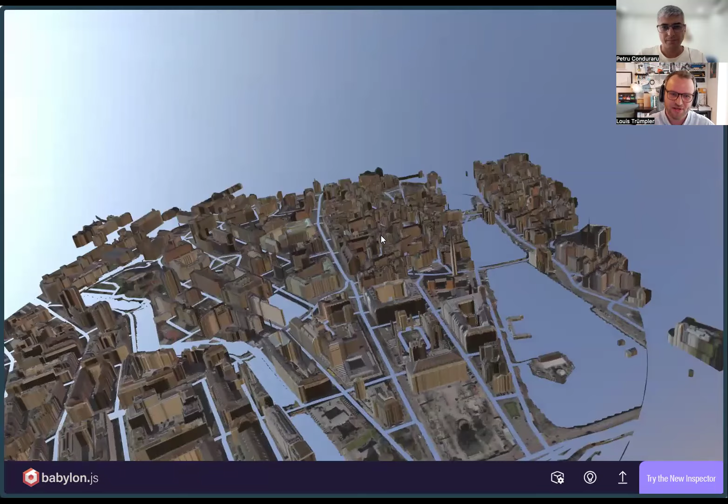Okay, let me share my screen. You should see that now—can you see that? Yes, I can see your screen. Nice. This is Babylon JS, an online GLB viewer, and this should just set the stage a little bit for what we'll see today. We are in Zurich, down in the city, looking from above, and we can also tilt this to see that we are looking at real 3D buildings overlaid with satellite imagery.

But if we wind back a little bit and take it one step at a time, the topic for today is actually the open BIM permit. When I say open BIM permit, what I mean is a permit application process based on open standards and open source—so that means it doesn't involve proprietary tools or proprietary data formats. Everything is open, accessible, and reproducible.

This whole thing started for me because I was asked by a few different people around this topic of open permit or building permit, and I had the pleasure to do some research from time to time. People contact me to find out some interesting stuff for them, which I gladly do, and since it's all open source, I can share it here today.

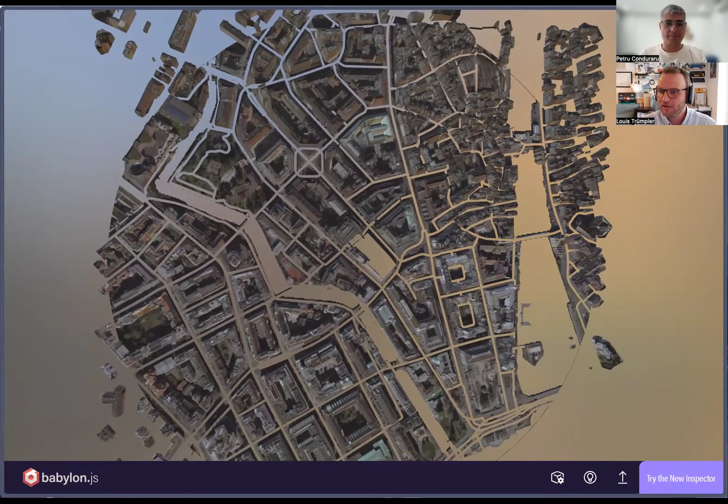That's amazing. And the whole thing basically started with the question—and it started here in Zurich actually—can we find out what can be built on a certain plot? So if we look at this map, and maybe we can color it, then for those of you who have been to Zurich, it's quite a nice area down here by the lake. So I thought to myself, well, it would be great if we could build something down here.

So I had to look around for some free plots, but yeah, it's all taken. But then I realized there is something here, and what I built as a prototype lets us do exactly that. I will quickly show this to you, and you can try this at home if you want to. Petru can share the link.

It only works for Zurich addresses, and it only works fully for the city of Zurich, because I've only implemented their building codes. So what you have to do is exactly what I did: you go to Google Maps, you find an empty plot, or you find some kind of plot, and then you copy the address.

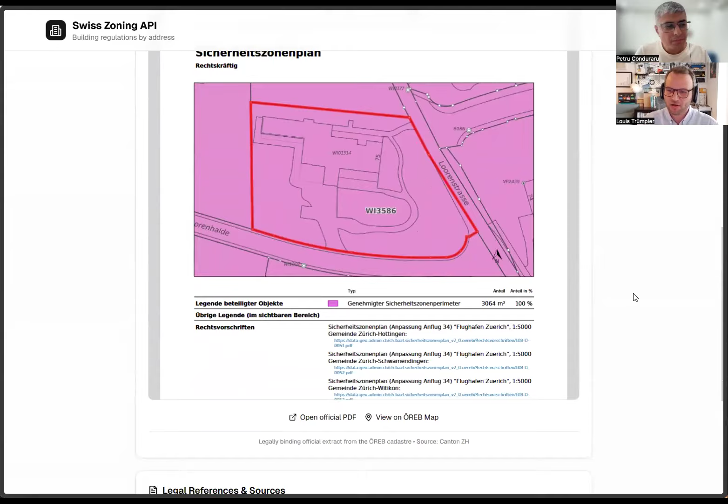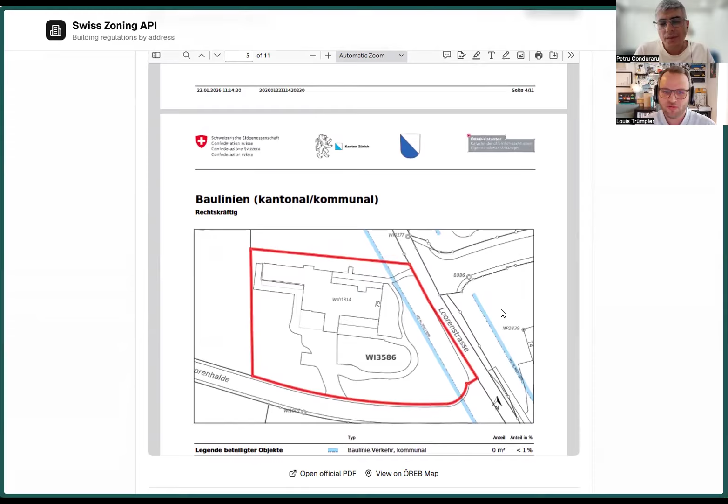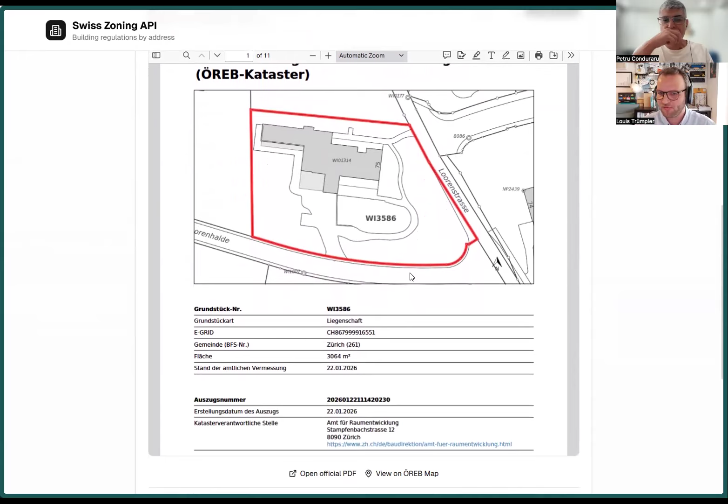If we then go a step further into the ÖREB, which is from our local municipality, we get all the restrictions for this site. For example, we can see here that this is actually in the flight path of the airport Zurich, and therefore there's some restrictions on this site. I don't know exactly what that means, but maybe that means something for an architect. You can get all the information from the official sources on this site that usually is a bit hidden in some PDFs, etc.

Does that make sense so far? Yeah, yeah, it looks very interesting.

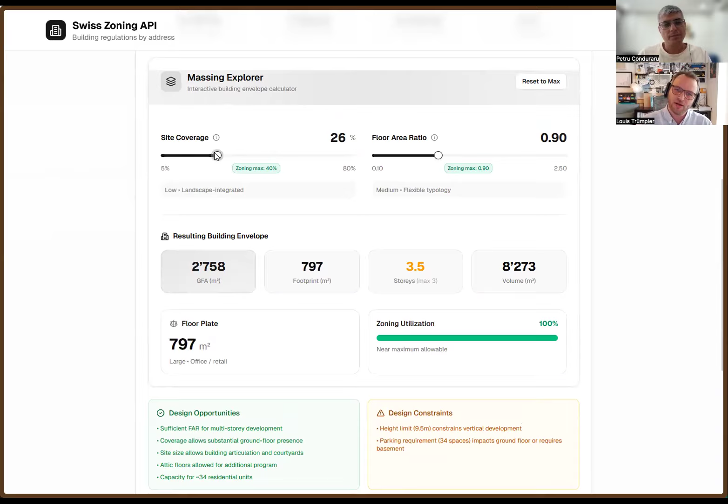So yeah, this information can then all be pulled together, and we can have a look at stuff like site coverage, or in German the Überbauungsziffer, and also the Ausnutzungsziffer, which is a floor to whole site area ratio. We can kind of say, well, if we only cover like 20%, and maybe we only have 0.8 floor ratio, how much could we actually build then? How many square meters? And maybe how many units if it were residential, or if it was an office.

So very early in the planning stage, before anything has actually begun, we can find out programmatically through openly available API sources, totally free, the potential of a certain plot in Switzerland, or at least in Zurich currently. So this proves that on the data side, there is a lot possible.

If we know where a building is being built, we can get the building codes for that building. If those building codes were in a machine readable format, which is of course not the case, I had to transpose them myself into something I can work with. Then it would be very easy to go to the next step, which is geometry, of course.

Let me share the GitHub for what I just showed you. It's open source, and the code is available for those that are interested. That can be run through the website pretty easily.

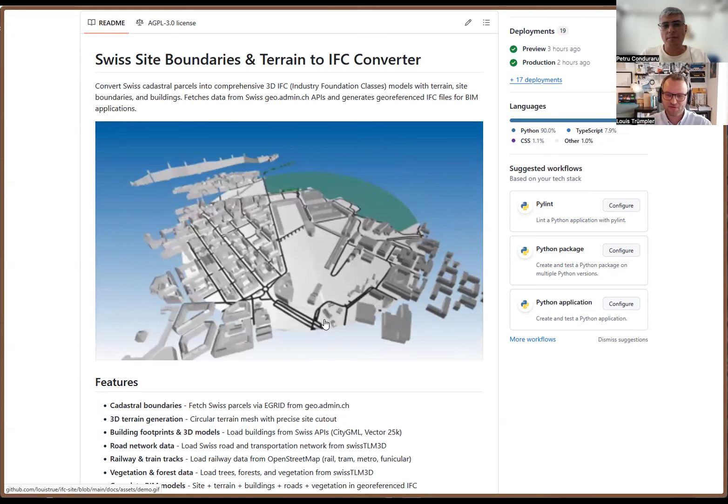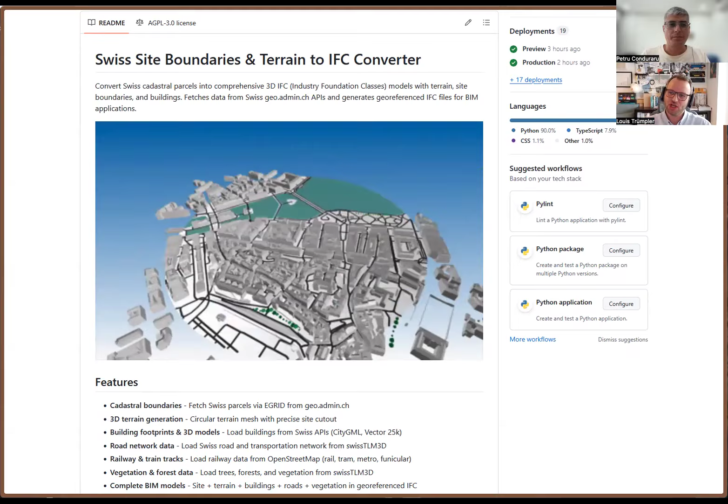Of course, there's a lot more that has to go into it to be complete. But then we have the basics: we have the IFC model, we have the official cadastral data, and now what I'm showing is how to also get the site boundaries and context into 3D, which then enables the later workflows that I won't be showing today, of actually checking how that building is going to work on that site and with those restrictions.

Makes sense, yes. IFC site lives on GitHub here, and I have to do a very quick tangent into software architecture. What I developed here is mainly a CLI, which is a command line interface.

That means you download the repository and you can run it on your machine. So your machine has the CLI and it reaches out to the APIs, it gets all the data, and it builds the IFC or the result files on your machine, which works great, especially for very large sites. It's basically the only way to use the full potential of the tool right now.

I have exposed it as a server API and I've developed a front end, but I did that just for today and it's still very prototypey. You cannot do things like get a kilometer of site over the API. I am not paying for a server like that, and it doesn't make any sense to do it like that.

If you want to do it like that, I would suggest you download some kind of code editor, maybe one that has some AI built in, and tell it: give it the URL to this repo, and just type in 'help me run this in the CLI,' and it will do it for you perfectly, and it will create the IFCs for you. Then you have it on your machine, and you can run it whenever you want.

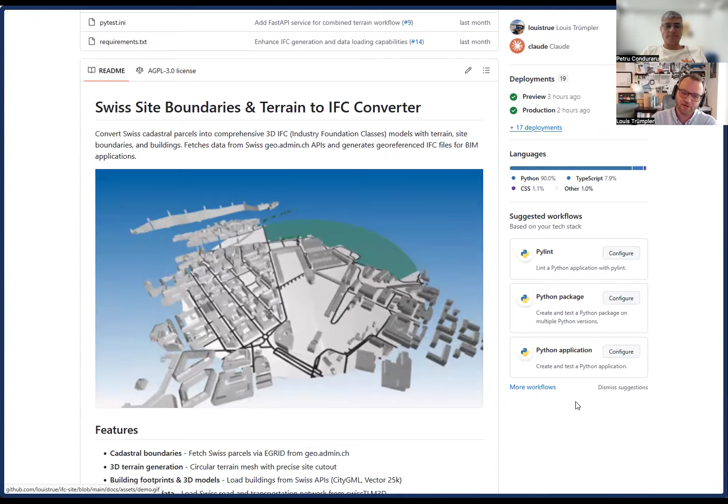Sounds very good. What I do here is I get a lot of different APIs. So I actually get the roads from an official source, they have all the road data in them. This is an official Swiss source from swisstopo. They make all this available by publishing all this data.

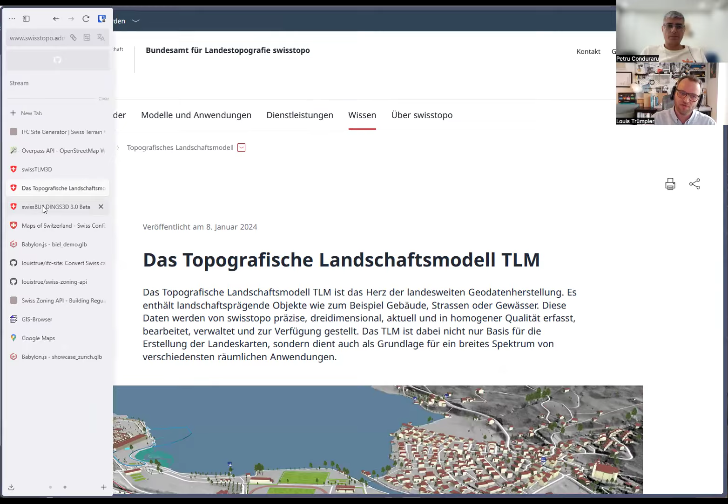And they also have the 3D data for the houses, which allows you to actually view the buildings in 3D, which is exactly what I use. I basically just convert that into IFC then.

I'm going to share the link to the user interface I built now. It might be a bit dangerous because it's not really production ready. But if you go to that site, you have access to the API.

You can do a lucky draw to get some Swiss addresses - let's do Toblerone, where they make the chocolate - and then you can say what you want, maybe the terrain and the site. You put a radius, and I'll keep it small deliberately since it fails sometimes, as I've said. Then we'll just have to rerun it.

And if the server goes to sleep, you'll get an error as well, and you'll just have to rerun it. But basically what it does is it goes to all these APIs, captures all that data, and then generates a nice, perfect IFC for you.

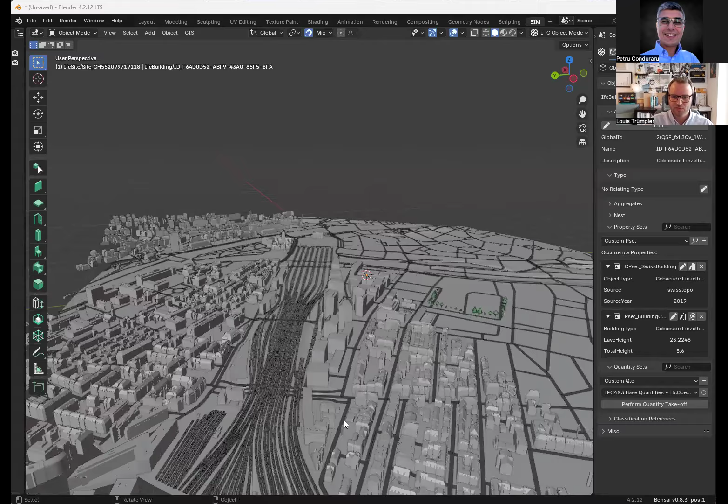If we look at one I prepared with the Zurich main station, you can see it's going to look like that. It didn't produce all the buildings here because it got overwhelmed at some part, so that's something to be mindful of. But I think this is one kilometer, so the railway station is here.

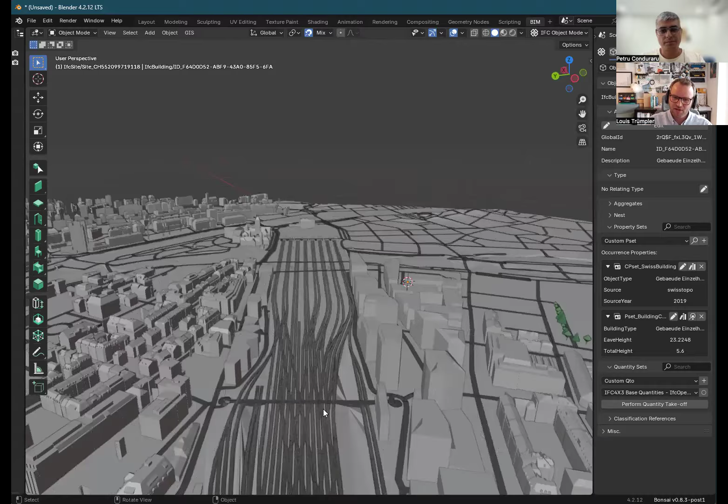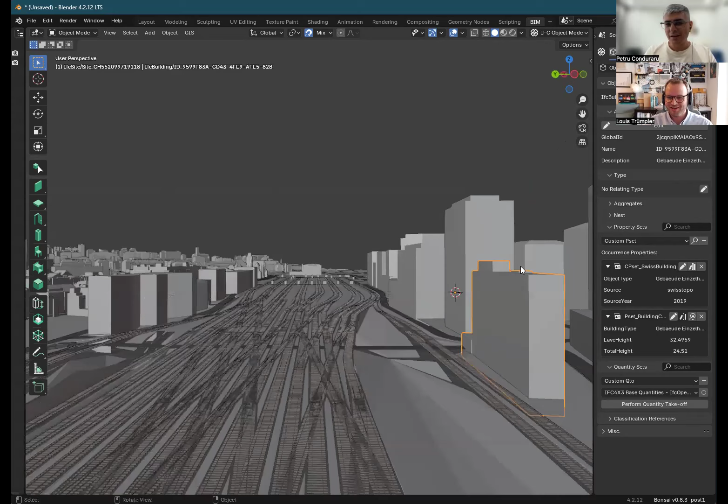Where does this information come from? Those APIs are very rich in data, and I just put everything in the right spot in IFC.

Also, for the buildings, we get what kind of building it is, the eaves height, the total height. We can also look at the site itself, because this is, of course, about the site.

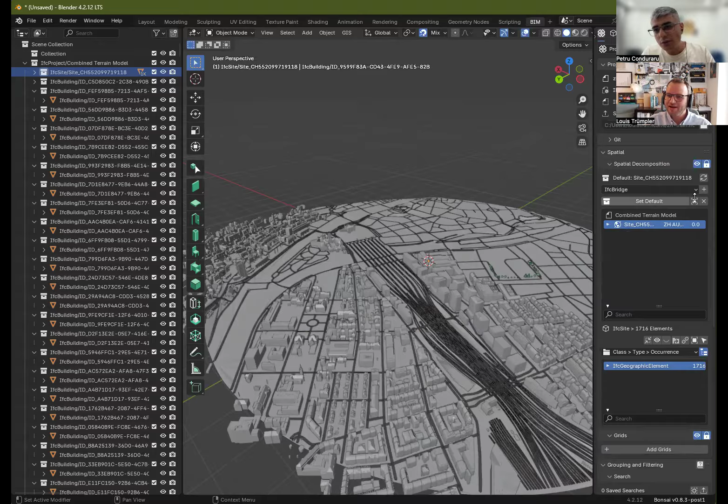And if I click on the site - how do I see info about the site, Petru? I have to go into general, the first tab here. But where is it displayed? You have selected it, it's above, the properties of the site. You have to click on that square - where is the set below text? There, click on that, now go into the information. Yeah, I was looking for that.

So you can see we have the GeoPortal URL, the land title, etc. We have the buildable area, because this is at least supposed to be for the site.

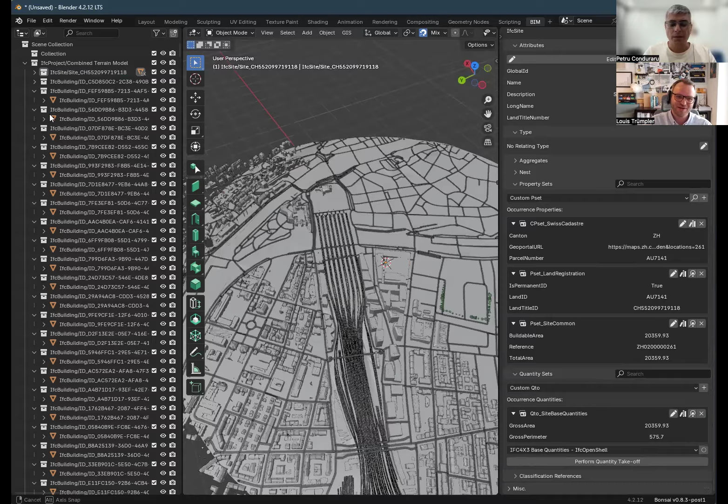We're starting to get some questions. So guys, keep them flowing. We're going to go over this later.

Let me switch back to the user interface where it has finished with that download. Now you can see I can download the IFC. I do have other options here.

I can take roads, buildings, forests - which is more like tree lines, not entire forests - the water bodies, the railways. And then I can also use satellite images. I've restricted it to five, so you'd have to deselect another one.

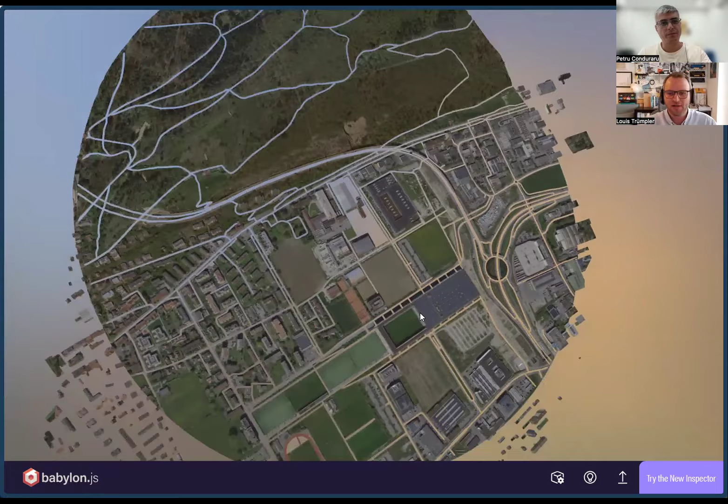The satellite images don't resolve well for IFC, but they let you create really nice 3D worlds with full texture, which is really cool, because then you can apply the textures to the actual buildings, which at least from above looks great.

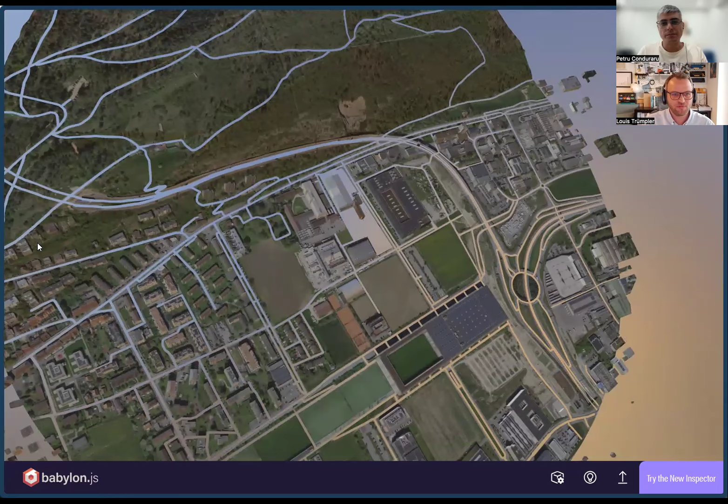If you zoom into the sites, you can see it's a UV projection, which doesn't work for the facade. But this isn't IFC, this is GLB. You can of course do it in the API very flexibly, but you can also do it here, where you say export GLTF, and it's going to create that as well.

And if I do that, or take another address, it's going to create those two files, the IFC and the GLB with the satellite image, which gives you the whole context of the site. It's not, to be honest, strictly relevant for the permit itself, but I believe it's still nice to get you going if you're starting with a fresh project.

So who is the main target audience for this? Who are the people who could use this tool?

I wouldn't recommend anyone to use this in a production setting, or to rely on the interface. This has been an exploration so far, where different people have asked me if different things were possible, and so far, yes, everything has been possible. That leads me to the conclusion that for the open BIM building permit, it's not actually the technical challenges that are the hurdles, but more like process or people's level issues, probably.

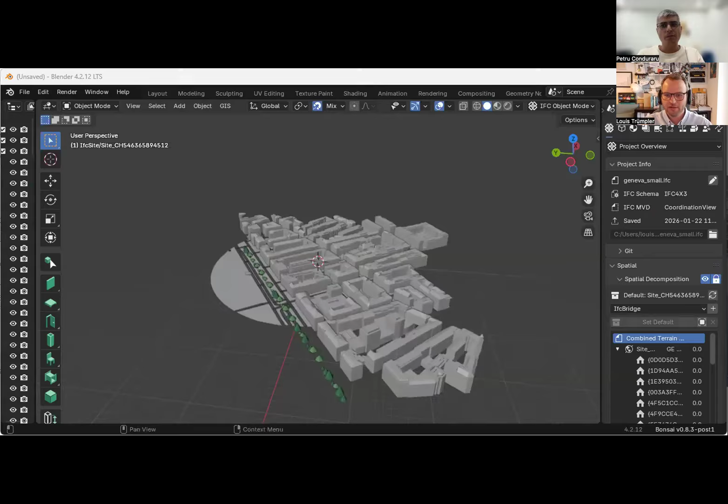No, no, this is mainly explorational, and I had to prove that this works. Usually it's my experience that things are sometimes a bit abstract to talk about, so I like to build something, have a showcase to look at and talk about, and then it often gets a lot more concrete.

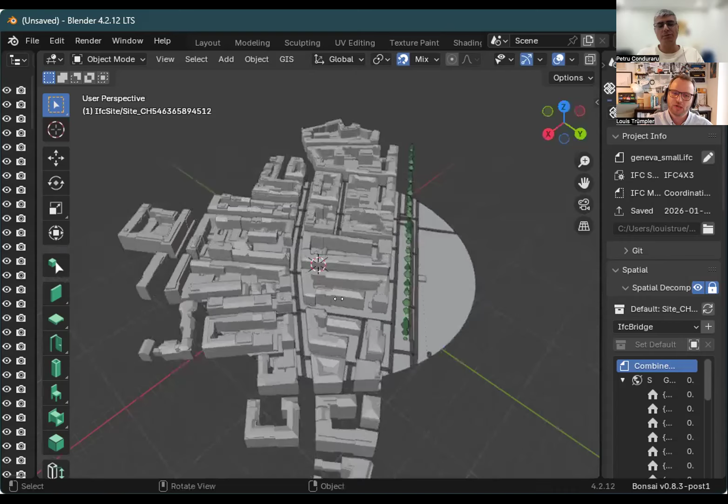Makes sense. But do you see any potential? Could this become a real project, something that can be replicated in other places? I'm sure people could take everything you have and keep building on it.

But in Switzerland so far, did you get any signals whether this is for now just helping to explain and clarify concepts, or might there be potential to go even deeper? Not really, I don't see this as a product. I see maybe if there's interest, I'll make the API more stable so architects can use it in early stage. I would be willing to do that.

It doesn't cost me any money, and we have to be aware that you can get all this data from other sources. You can even write a request to Swiss Topo and they will put it into IFC for you. You have to write them an email and get it back as an email. I've never done that, but I think they have a very similar script to what I've developed, just with their internal sources, probably using IFC OpenShell as well.

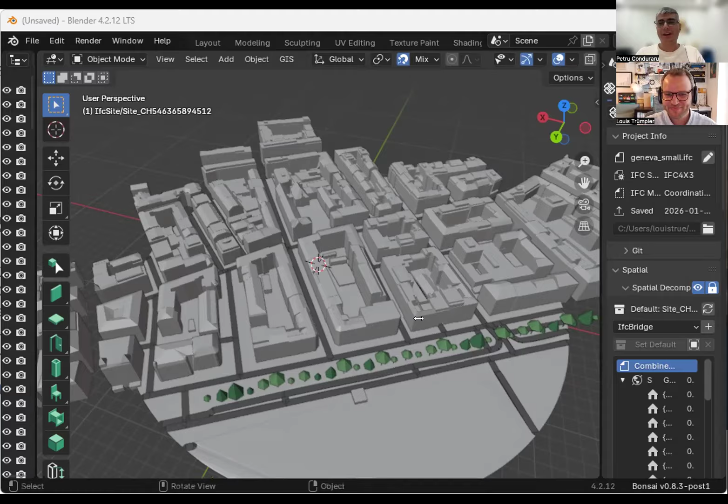I don't want to challenge their service or anything like that. I'm very thankful for what they do, and I'm not going to be a competitor with Swiss Topo in any way.

So the next one from Mikhail Lipsky: Do you get zoning data through the API, or does your tool have to scan through PDF documents defining requirements?

The zoning classification I can get from the API, so what kind of zone it is, for example the W3 we saw. What that means is another topic, and that's what I mentioned with having those requirements or regulations in a machine readable format, which isn't the case.

What I did is I downloaded the PDF of Zurich with the Bauordnung etc., and I scanned through it, and I thought okay, W3 means 3 stories. Then I took some other stuff from it just to prove the point, put it into a JSON, and used that as a very basic version of how this could work in practice. I believe this is a great hurdle for the whole openBIM permit, because all the municipalities would have to translate in some way their rules and regulations into something that can actually be used in a machine readable way.

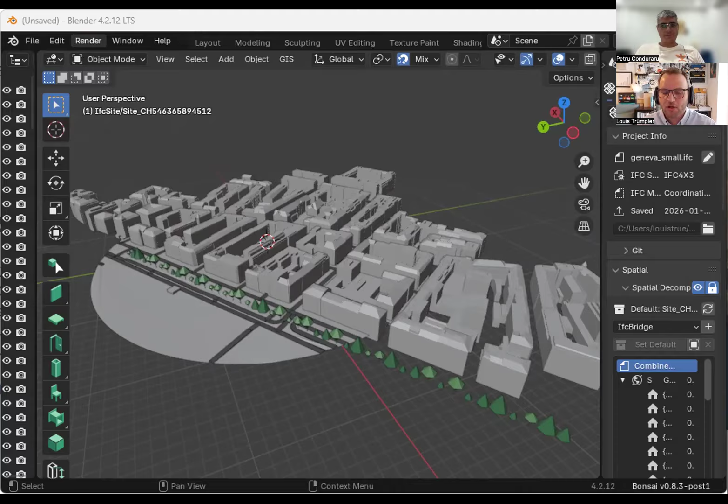The thing that I showed at first is only restricted to Zurich, and that's exactly for the reason I just said, because I had to encapsulate their building regulations, which I'm not going to do for the whole of Switzerland. And then also I'm using the local APIs for that, which is a bit different from the federal APIs. But let's not get into too much detail of Swiss politics - so yeah, this is very limited, basically only to the city of Zurich.

It would work if we could translate other building code requirements, but the IFC site where you get the actual 3D data, that will work independently of where you're from. So that works for the whole of Switzerland.

Arun Ravikumar says, nice app. Thank you, Arun. Pierre Venter is asking, what's rocket science for older people? If you have an answer to that, you can go ahead. Ricardo Simões is asking: compared to the reality in Portugal, it seems like I'm watching a science fiction movie - incredible work, congratulations.

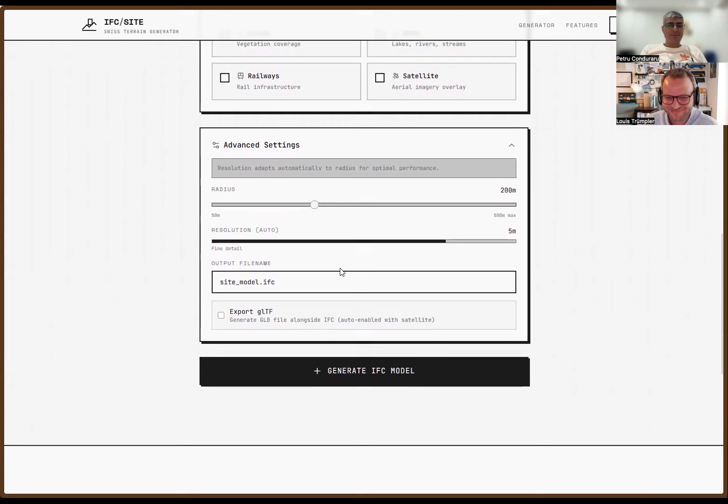Thank you. Amazing stuff. Yunus Chuntuk is asking, wouldn't it be easier to work with CityJSON or GeoJSON?

I do actually - the APIs return GeoJSON for some cases. And then I even get CityGML, or what's it called, I don't remember. Especially Geneva etc. has very detailed building elements that they even give in different formats.

I'm just showing what it can do. So you can download the image, the texture image, and you can download the IFC, or you can download the GLTF.

The GLTF cannot be opened in a normal IFC viewer - you have to use an online GLTF viewer, but then you can feed it in here and you get your model with the texture applied to the terrain for our little site here.

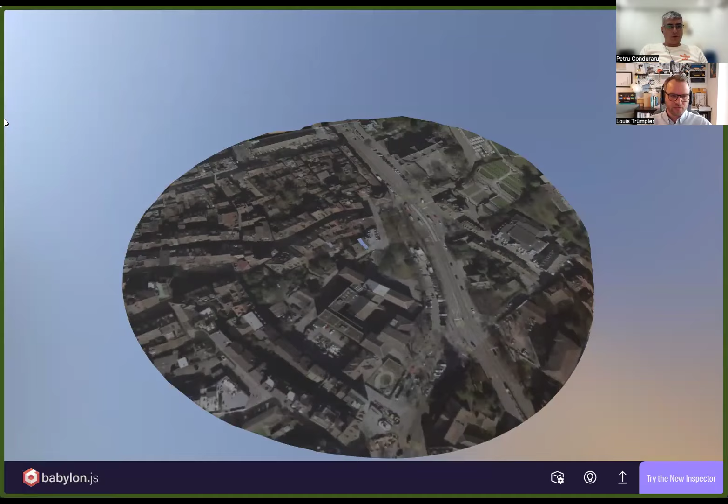Vlad Trestaru is asking, the Swiss zoning API repo seems to be private. Oh, I'm sorry about that, I'll make it public afterwards. It's not supposed to be private. I can open it.

Great, Vlad, I hope you got your answer. Roger Sennhauser asks, can we get the site boundary cadastral parcel geometry per EGID? Yes. EGID or EGRID? I only read EGID in his text. You can go from EGID to EGRID, but I work with EGRID, I don't work with EGID, but you can go from both. I only resolve the address, so you can type your address here, and then I resolve it to the EGRID. But yes, that shouldn't be a problem, I would say.

Pierre Venter says, I like the approach to package the access to the data on a light platform. Good one. Pierre again has a question.

The initial requests are saved for future queries, example, the planning department may be approached for amended planning requirements. Yeah, that could be a cool extension. From what I hear, Dubai actually has this in place. I think they have a process where you can upload your building model and then you get basically instant feedback of how compliant you are with the building regulations and requirements. And then you can get better over time, and get to 100%, hopefully, before somebody even has to look at it and waste time telling you what you've done wrong.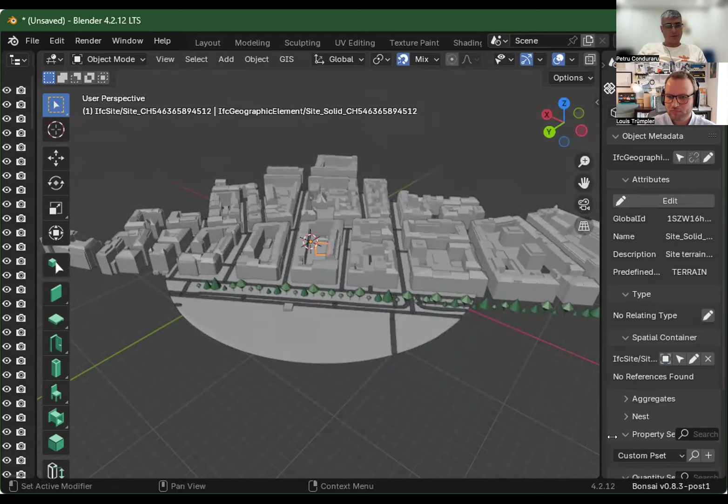Can we extract the rules in any machine readable form, from Nick Nisbet. Can we extract rules, the rules in any machine readable form? I assume he means the building regulations rules. And yes, of course you can.

Here we are very much into the process area, where I'll tread carefully. Building codes are very, at least in Switzerland, different from place to place, and there's a reason why they are not the same everywhere, and we have to accept that. People work differently depending on where they are, and they have worked this way for years.

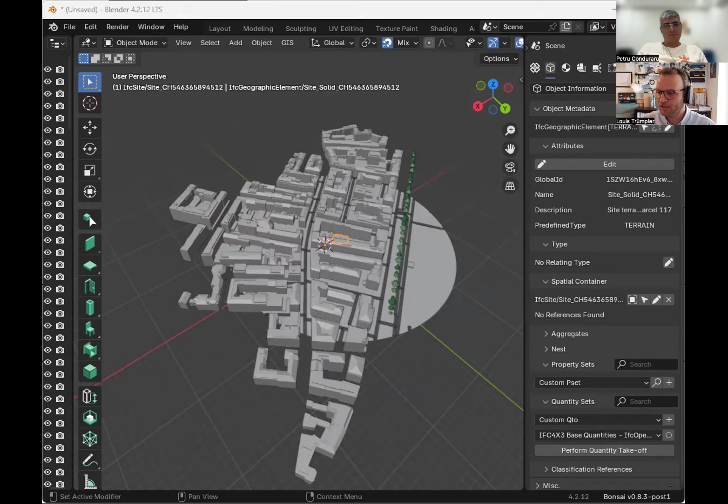Imagine you work at some official place where you handle building permits. If some tech geek comes to you and tells you, well, I have a good initiative and I am going to encapsulate all your logic and everything that you do, put it into a machine, and it's going to be much better than you - how do you think that makes that person feel? I wouldn't feel that good if someone came to me like that. And that's only on a sentiment level, which I believe is important if you want to work with someone.

But on a more technical level, this is usually their starting point when they start with such an initiative. They have to encapsulate their building code into some kind of logic, which is not very sexy, and it's not a cool ramp up if you want to get new stakeholders and municipalities. You have to tell them, well, you sit down and put all your logic into my Excel template or whatever it is, and you're going to spend 3 days and be frustrated. Nobody likes to start a new project like that. So I think these are the tensions that we have here, and those are real.

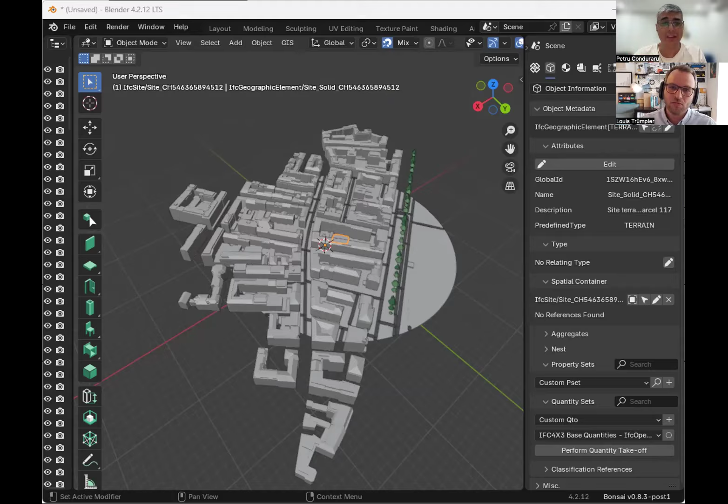We got some more feedback from Nick Nisbet regarding the machine readable format, and he says IDS, RASE, or IFC constraint. Yes, definitely, now I understand.

And to be honest, I haven't looked into that too much. I've been pretty content with my JSON files. But yes, there's a lot of potential there. I agree, Nick. Might be worth having another chat sometime.

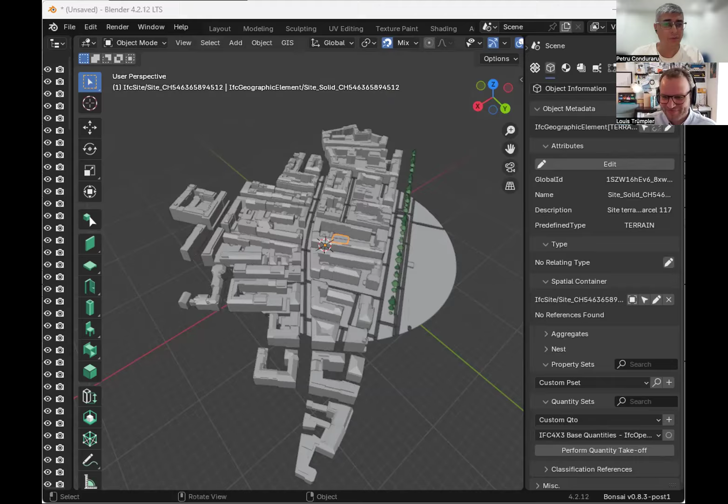Okay, we got a few addresses. I'm sending you one in Zoom. Unfortunately we will not have time to go over all of them. Let's take the first one from Stefan Wolf. Thank you, Stefan, for sharing this. Sorry, Jan, Pavel, and Nicholas for not having time to go over all of them, but you can apply the same thing exactly how Louis is doing it for the first one, right?

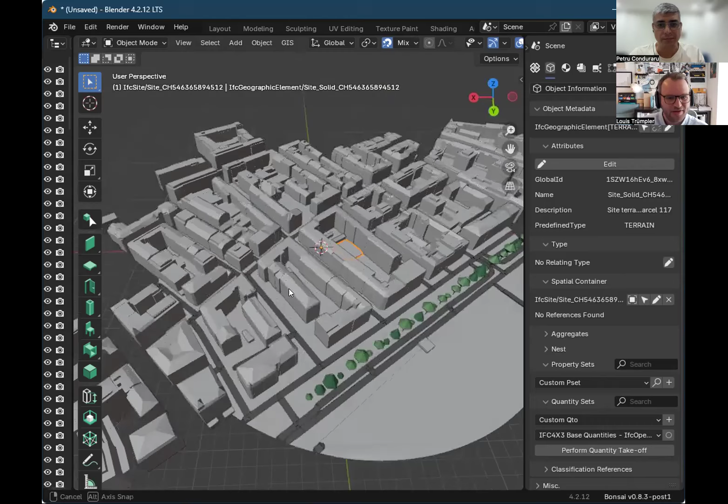Yes, and this is Geneva, the West Schweiz that was requested before, where we can see that we have the lake down here, and I think this is the old city of Geneva. The other one is loading, it's loading the railways.

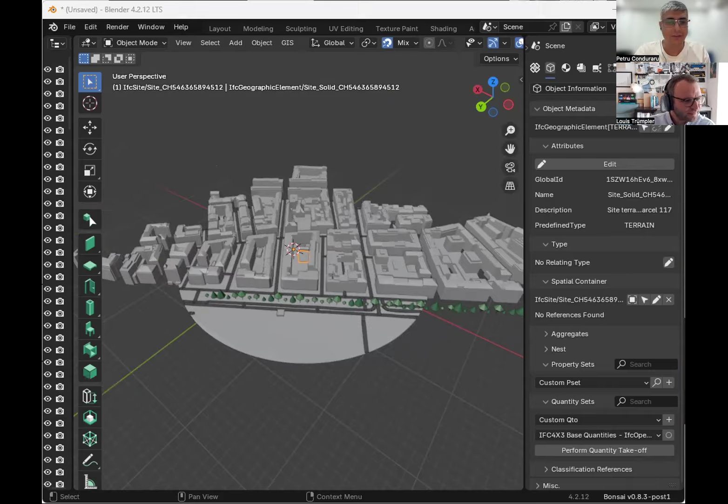And the railways, I can ask next if you can reply to something else until then. Yeah, go for it.

Bernd is asking, I missed the first minutes, maybe it has been said before: how about Swiss cadastral data? It is on Z equals 0.0 - did you move it to the correct altitude?

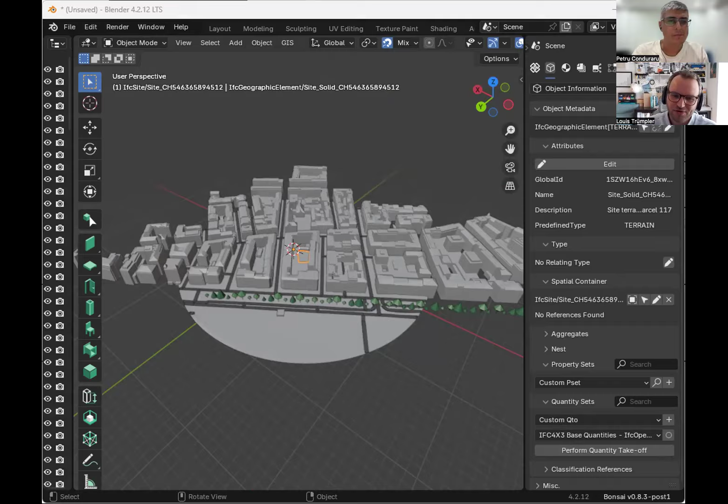Yes I do. I don't work with, let's say, I get the site boundaries and then I project the site boundaries onto the actual terrain, which works really well because it allows you to actually be like in the real world. This was quite a lot of exploration, but I had to realize that if you don't project it, you get like a flat site, which doesn't make any sense, and sometimes terrain can be quite steep, especially in Switzerland.

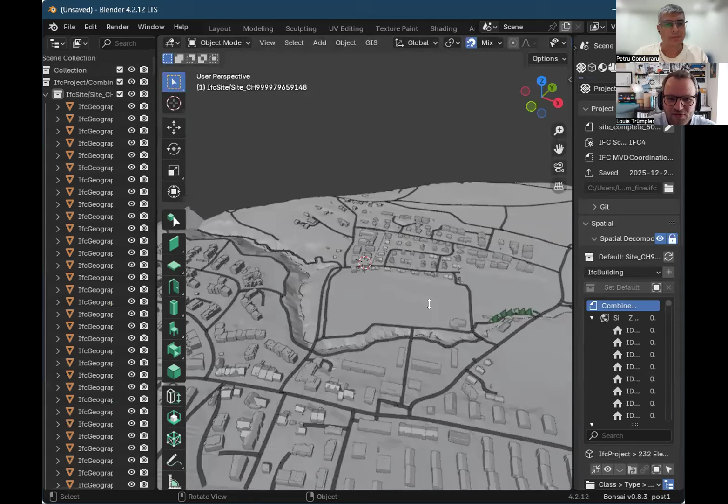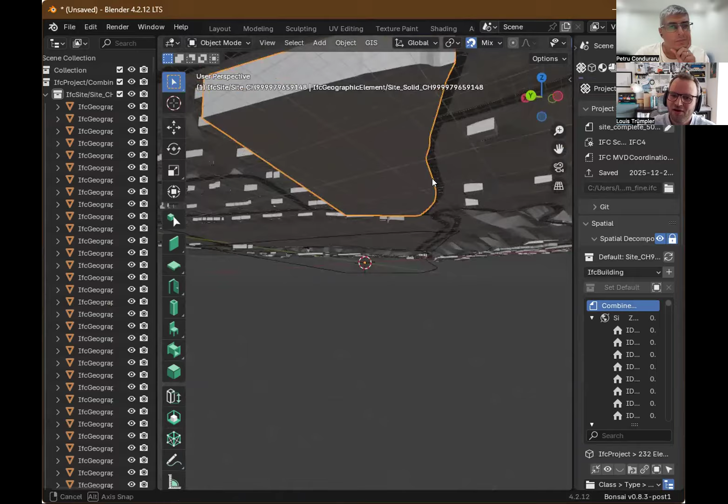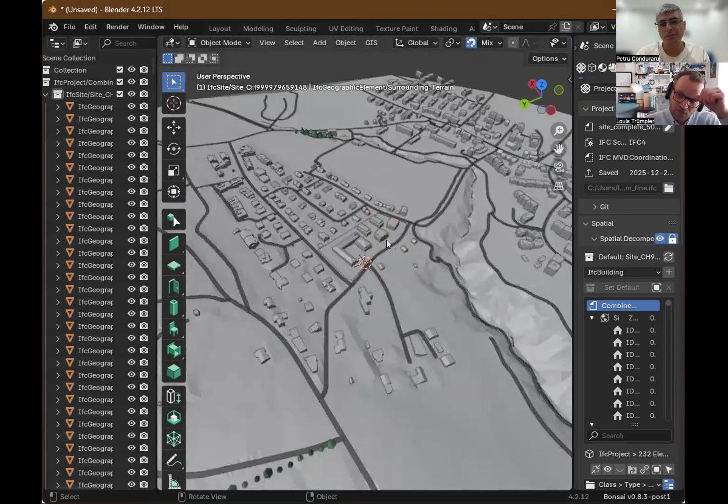So what I then do is that the actual site that you can see here, because we are looking at that site, I project those site boundaries up onto the terrain, and then I build up the site downwards. So the site is actually a 3D body, a B-rep mesh that has the exact outlines of the site, and then it gets projected onto the correct height, which is meters above sea level.

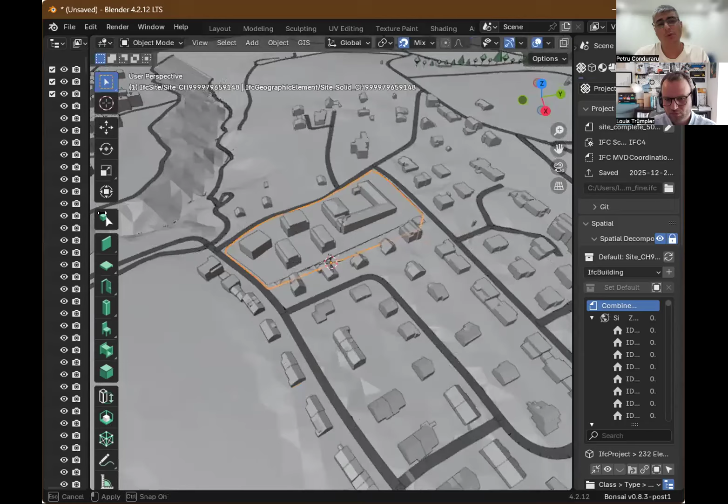Yeah, and then I take the midpoint of that whole site, I look up its coordinates, and I save it into the IFC, perfectly georeferenced, which means the site has an IFC map conversion and relates to the Swiss LV95 data. Okay, we won't have time to go over all the questions. Raphael asked how it works with georeferencing - I guess you just replied to that. Yes, that georeferencing is applied to the site.

I take the middle, and then I use the middle as 0,0 for local coordinates. But then with the map conversion, we know where in the world we are. So we have local coordinates - best practice in IFC.

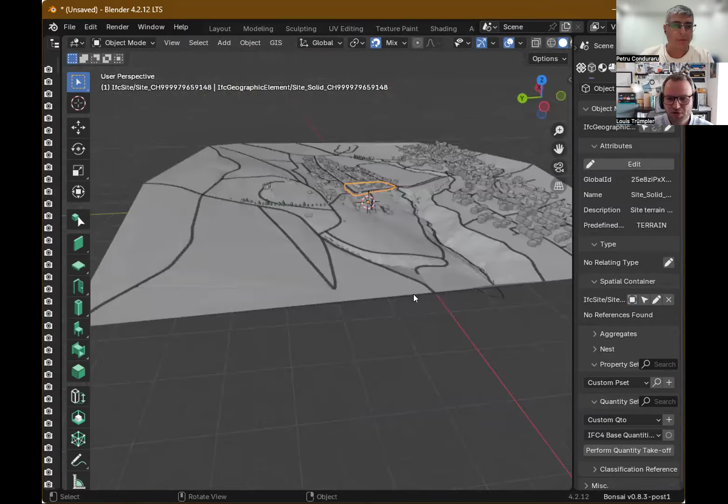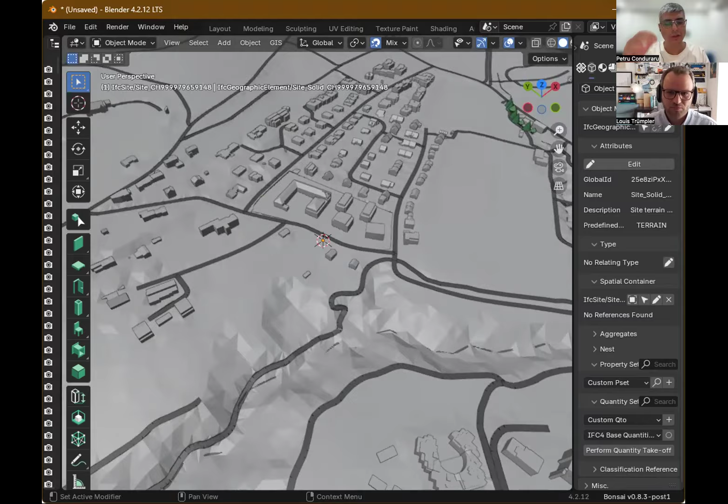Nick Nisbet says that Singapore, Dubai, Estonia, and Finland all have compliance checking. Yeah, Finland is new on that front as well, Dubai as well, but it's still a long way to go to become industry-wide, for everyone to use it. But I like that they have compliance checking, and Nick also says that relieved staff can focus on site inspections.